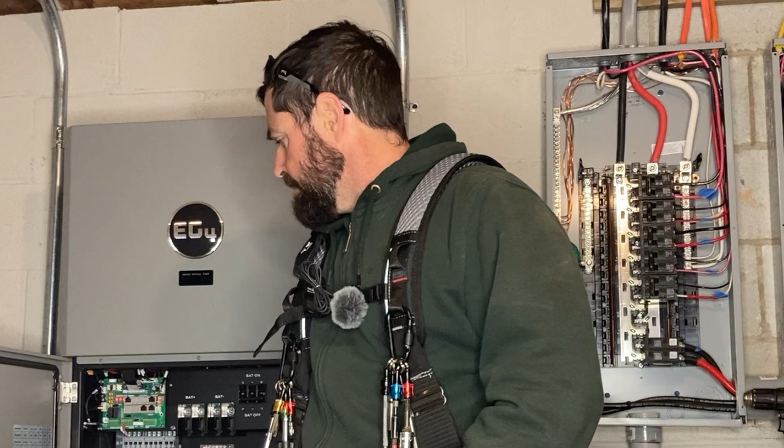We're going to be down here pulling some wire for the DC. We're going to be mounting some bus bars that are going to connect our EG4 inverter in the future. We should have a really great series for you to watch today. Let's get into it. All right, so I've got my layout started here.

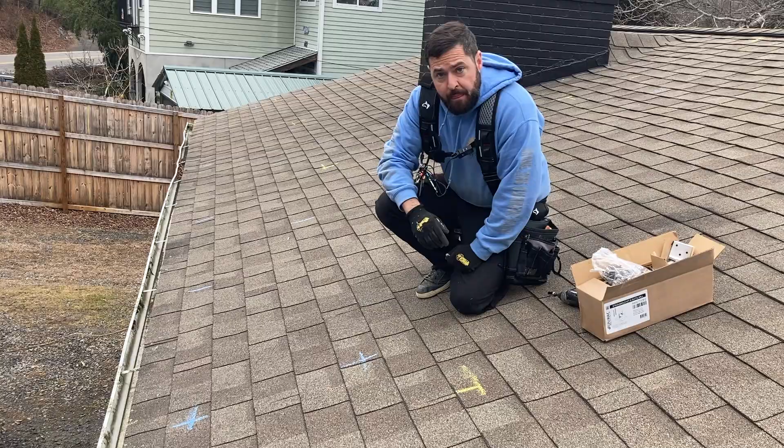A few things to note. A lot of people use lumber crayons, but those marks will stay on your roof for 5 or 10 years, and if the roof is visible, you'll be looking up at some bright red or yellow crayon marks all over your roof to the end of time. So what I like to do is just use plain old sidewalk chalk, and that way it'll just wash off after a few rains, and it's not going to stay up here forever.

Another thing, I use 2 different colors. I use one for my attachments or rails and another for the corner of my panels. It's really easy to get turned around up on the roof once you do your layout if everything's in the same color, and you end up drilling holes where you shouldn't. So I always like to use 2 different colors. I mark out all the edges of my arrays, the edges of the panels.

That way they'll be staggered, hitting different rafters all the way down, and it's going to evenly distribute the weight of the racking system and solar panels on your roof. Instead of having all the attachments on one single rafter all the way down your roof, it's distributed amongst different rafters. So today I'm going to be using the Unirac NXT system on my roof. It's just a brand that I trust and I've worked with for years.

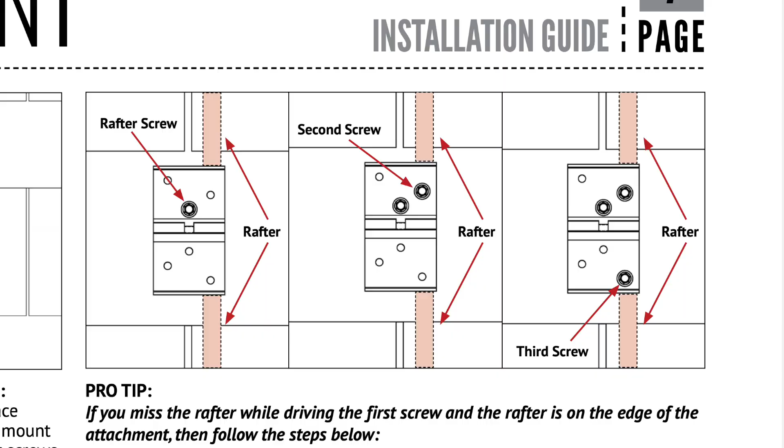If you miss on the next 2, well, you just sink all 6 screws into the attachment and you leave it deck mounted. And that way, hey, you never have any missed holes to seal up.

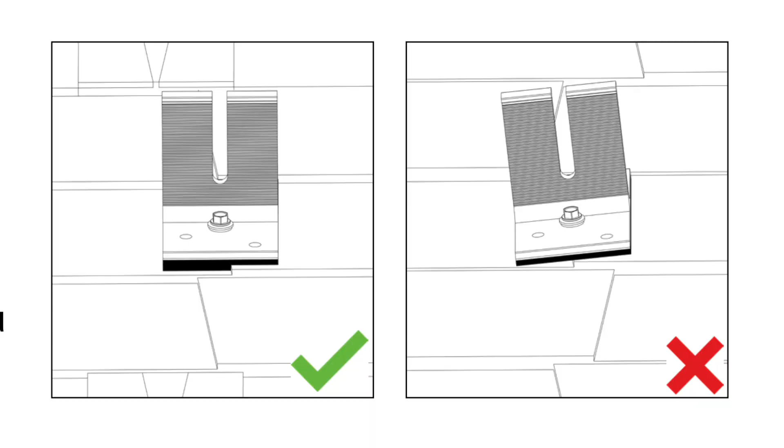And you know, it just preserves the integrity of your roof much better than, in my opinion, a flashed foot will. Now, a couple things you may want to note. Technically, you're not supposed to straddle the edge of a shingle. So in some cases, they do sell little extra butyl pads where you can put additional butyl below.

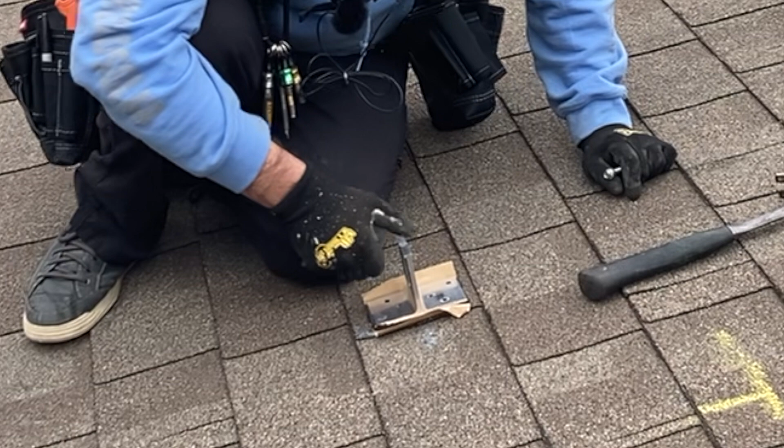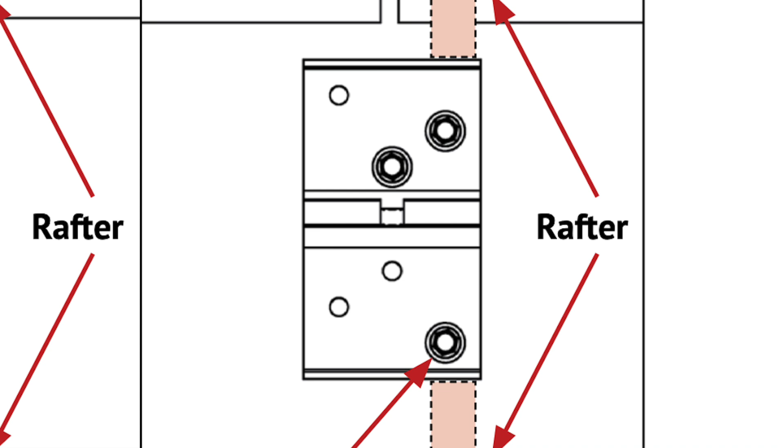Another thing is you can move it. So you can use any 2 holes on here again. So in this case where I've got this shingle edge, I can line it up right with the edge there and try to hit that. And then again, if I happen to miss and it's not this way, I can just sink all 6 and call it a deck mount.

All right, and that was solid as a rock. You could just tell when you're in a rafter, it really locks in. When you miss, it's gonna go in real easy and it might spin. So in this case, I've nailed the rafter dead center.

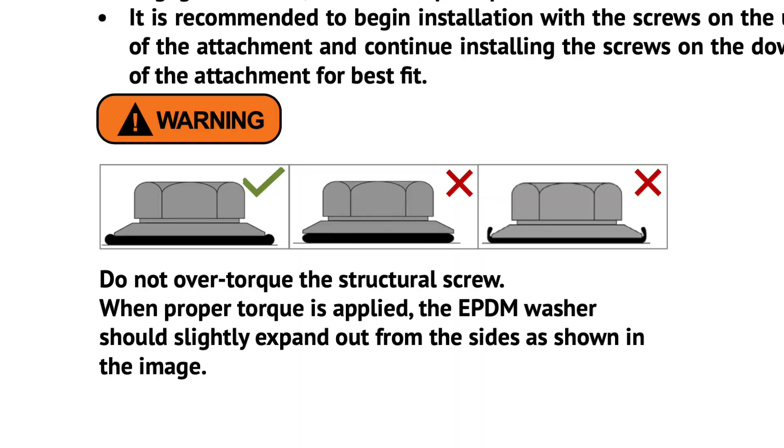And you really just wanna screw these in till they seat. You want them tight and you want that washer seated against the attachment, but you don't want to lock it down so tight that that neoprene washer blows out and kind of sticks out of the side. That'll cause premature failure of the neoprene washer.

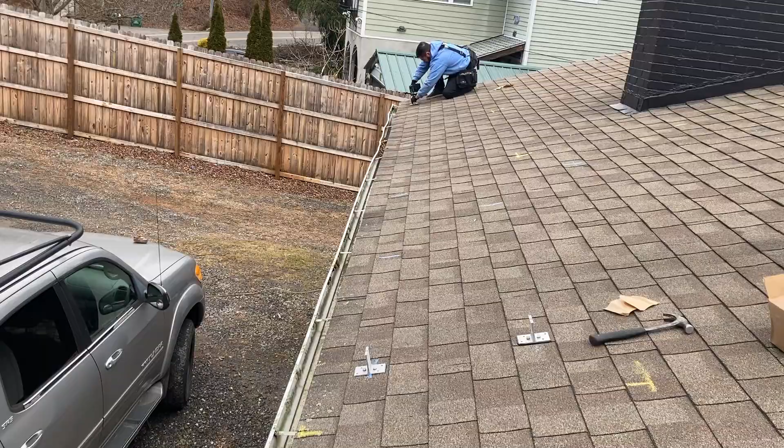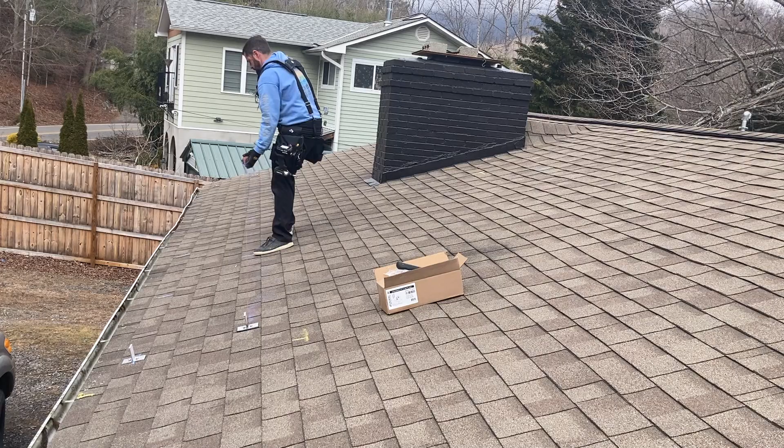So now I've got my first and last feet mounted. I'm gonna go ahead and snap some string lines to make sure they're all lined up nice and even, so that our rails are nice and straight. All right, and I can feel that one sort of curve off the edge of the rafter. So again, I know it's to the right here.

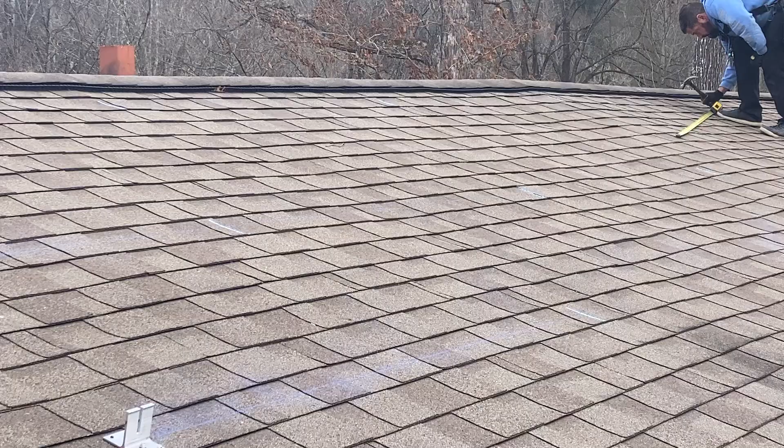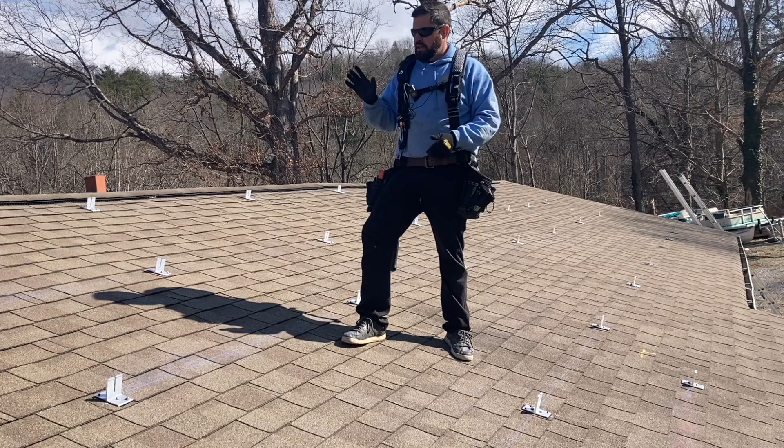All right, so I've got pretty much all the feet down. One thing to mention is I ran out of screws. So Unirac sends 2 screws per foot. I guess they're assuming you're a perfect person, but we all know that doesn't exist out there. So no matter how good you are at finding rafters, at some point you're gonna miss a rafter. I'd say probably about 10 to 15% of these feet, I didn't lock that rafter in with the first 2 screws, and I had to add more screws in order to make sure I hit the rafter and it was nice and secure. I think there was only one attachment where I had to use all 6 screws because I missed the rafter altogether.

Now, if you're in an area where you've got thick plank decking for your roof sheathing... I've got plywood. That makes it really easy to find rafters. You can hear that hollowness of the roof when you're beating on it with a hammer. But if you're in an area where you've got that thick 1-inch decking, old plank decking, or maybe skip sheathing or something like that, it's gonna make it a lot more difficult or almost impossible to find the rafters on those projects. So in that case, you may even want to order up to 6 screws per foot.

Now, I do believe I ordered a couple extra bags of screws because I knew this was gonna be an issue, but it doesn't look like they came with the order. May have been my fault, I'm not really sure. But basically I ran short there towards the end. So that's gonna slow us down for today. I'm gonna go ahead and get the rails mounted on the attachments that do have all screws secured. And I'm gonna have to order some extra screws for the ones on the ends and continue this next weekend.

So next we set this into the rail. This is what's going to hold the rail itself. I'm just going to kind of leave these lying loose because I'm going to get them all in there, get the rails in, and then we're going to level the rails. So I'm just going to go around now, get all these in there, and then start laying rails.

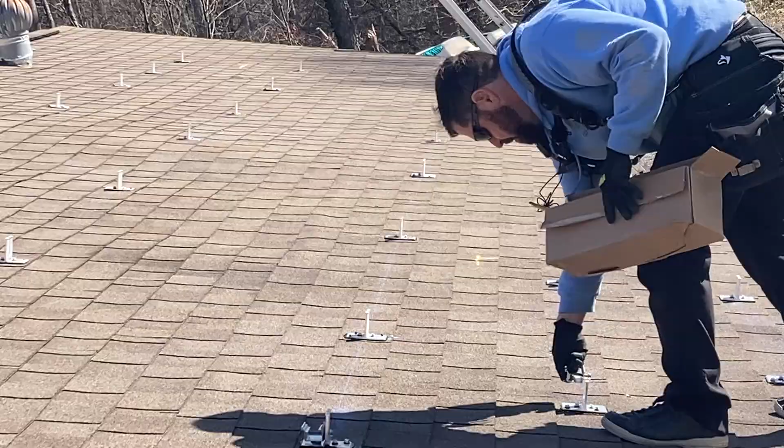All right, so you just kind of snap them in place. You can feel them kind of click. And then I'm just going to snug it down. These are likely going to get moved.

Okay, so I usually like to leave my rails in full length and lay the panels and mark the rail when I'm done with the last panel, marking it exactly where I need to cut it and cut it in. Because when you cut them to length ahead of time and things aren't perfectly square, they don't always line up the way you would like.

In this case though, I've just got basically a stack of 2 panels each, and this chimney is kind of in my way over here from leaving these fully extended. So I'm gonna go ahead and go against my own advice here and pre-cut them, and I'm just gonna be very careful to square all these out really well so that when we go to lay panels, everything lines up perfectly. So I am leaving about an extra 3/8 of an inch just to leave myself a little bit of wiggle room.

And remember, when you're pulling these measurements, you got to include not only the width of your panels, but also the end clamps and mid clamps. Since I'm using Unirac NXT racking, each clamp, whether it be a mid clamp or an end clamp, is about a 1/2 inch wide. So you're gonna add a 1/2 inch for each end and mid.

Next, we want to make sure we're not going to hit a rafter. In this case, I know my rafter's right here. We got hollow roof, so I'm going to kind of pick my location here. I'm going to use the lid as a template. And I'm going to make sure that it is between 0 and 2 inches down from the next course of shingles. So in this case, let's just go with 1 inch. All right, so that's the outline of the box.

In this case, we're going to be flashing the box up under this layer of shingles, and then we need to make sure that no nails are going to prevent it from coming up under the next course. So when you do this, you want to take it nice and easy. Make sure you don't rip any shingles.

All right, I think I'm going to be clear of nails, but we'll find out when we go to flash it up under there. So next I'm going to cut my shingles. I use a pair of old tin snips. I know it's probably not great for the blade, but they do make a great shingle cutter.

Now we're just going to test flash it. Oh, it fits like a glove. We didn't hit any nails, which is great. That means we don't have to pull any nails out.

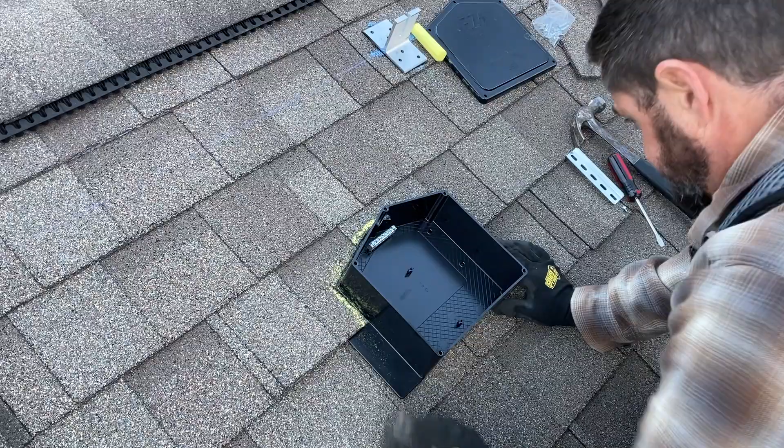All right, so next is the drill zone. I'm going to be bringing 1-inch conduit into this to bring my PV strings and my communications cable for the Tigos. And we kind of want that in this area, you know, above the layer of shingles. The box will come with some instructions on the drill zone. In my case, I'm just going to put it right up here near the top. So I'm going to use a hole saw, and I'm sizing this hole to be the diameter of my conduit fitting.

So now I've got my hole drilled for my conduit fitting. Now something a lot of people are going to kind of screw up here is that we want a larger hole for the hole that's going through our roof deck. The reason being is this conduit fitting is going to be sticking down through the deck, and it's wider. So if you only drill the hole this size, you're not going to be able to get your conduit fitting up into the back of the SolaDeck. Or in this case, the EZ Solar Junction Box XL.

So we'll test fit that. We're going to get that fitting in place. If you're working with multiple people, you might have someone in the attic stubbing the conduit up while you put on the lock ring, but I'm working solo here, so I'm going to try to do that ahead of time, so it makes it easier to install the conduit in the attic by myself. All right, so now we're going to do the larger hole.

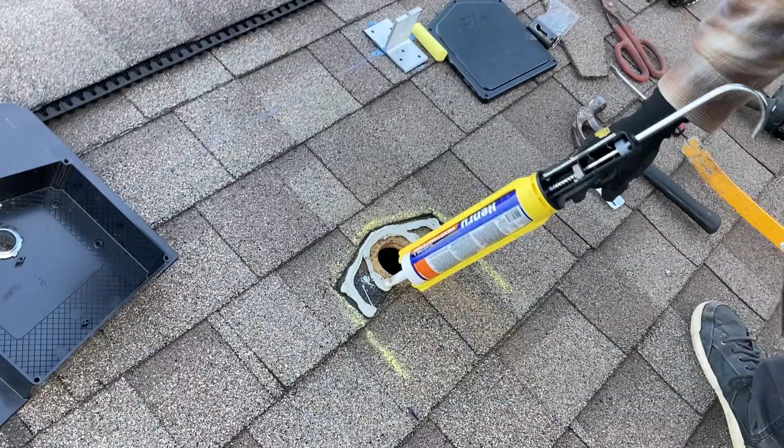Real generous with the sealant right here by the penetration, but I'm going to leave the bottom open so that if for any reason water ever does get under there, it's going to be able to easily drain. Now we're just going to drive our screws through. And we're just going to put another layer of sealant across the upper edge. It's really not necessary, but belt and suspenders, as one of my great mentors used to say.

All right, so this thing is installed and ready to rock. We're gonna save wiring it up for another day. So I'm just gonna go ahead and put the cover on. You'll notice these stainless steel screws are the ones for securing the box. Here I'm just making sure that any of those nails I had to pull out are going to be nice and sealed up, so that we don't have any water ever making its way back down in here.

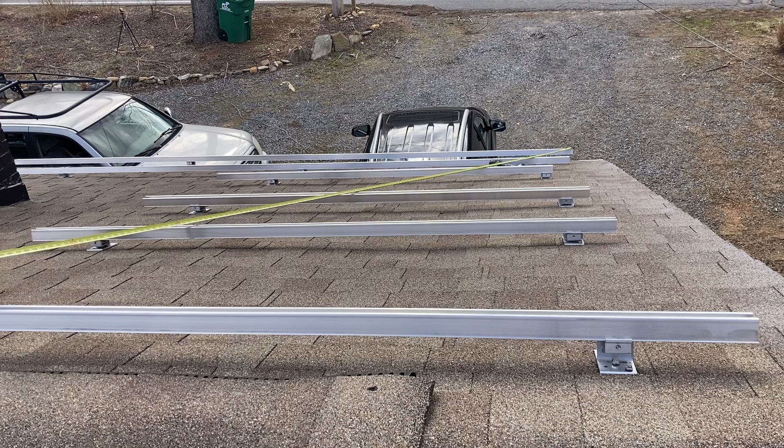All right, so now most people might have a second person. This is what is ideal in this scenario, and you'll pick one corner of the tape measure to put to that corner of the rail. I'm just going to have to try to center it because obviously I can't really play a balancing act with the tape measure here. So I'm just going to try my best to center that corner on the center of that tape measure. I'm going to pull it up to the edge of this rail and get my measurement. So to the top of the tape measure, I have 193 and 5/8.

So next I'm going to do the same thing with this one. I'm going to try to center that tape measure as best as I can. We're going to pull it to our mark, to the top of our tape measure. We got 194 and 3/4. So we're off by like 1 1/8 inches. This way it's longer, so we want to make it shorter.

The way we're going to do that, we're going to keep this bottom rail as our point of reference. We're going to move the top rail over to the right. Roughly, we'll just give it 3/4 inch and see what happens. So I can just mark my rail at the foot here.

194 and 5/16. All right, 194 and 5/16.

All right, so now that we got our top and bottom rail locked in, we're going to pull a string line from the top to the bottom, and we're going to line all of our other rails up in between. So we'll tie a little knot. We'll just hang it on the bolt down here. Now we're gonna pull our rails to the edge.

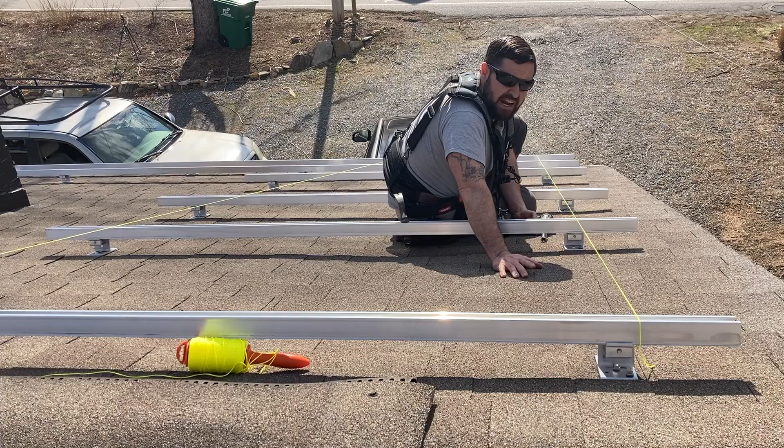All right, so I'm sure you got the point by now. We're gonna go ahead and do this across the entire array and continue on. All right, so now we've got our Unirac splice kits, rail splices. They're pretty simple. You just slide them into the rail. There's a little line right here that you want to line up with the seam.

Me personally, I like to leave a tiny little gap, and that way it just provides a little bit of room for thermal expansion and contraction. I'm just going to use maybe 1/16 to an 1/8 inch of a gap there, and we're going to lock these into place. All right, and so that bonds the rail together electrically, as well as connecting it together securely physically.

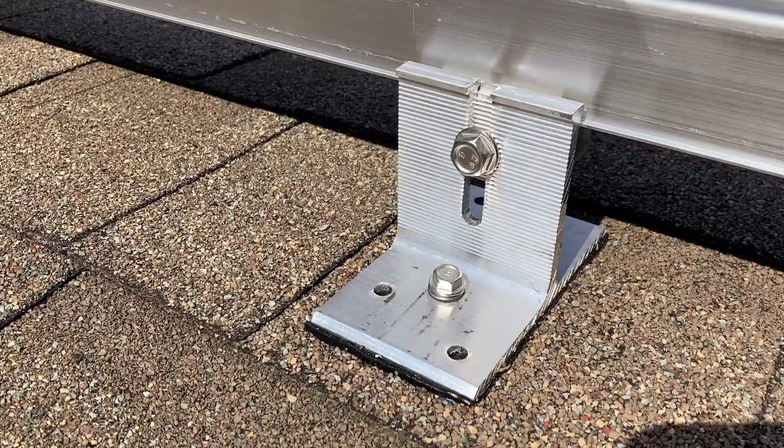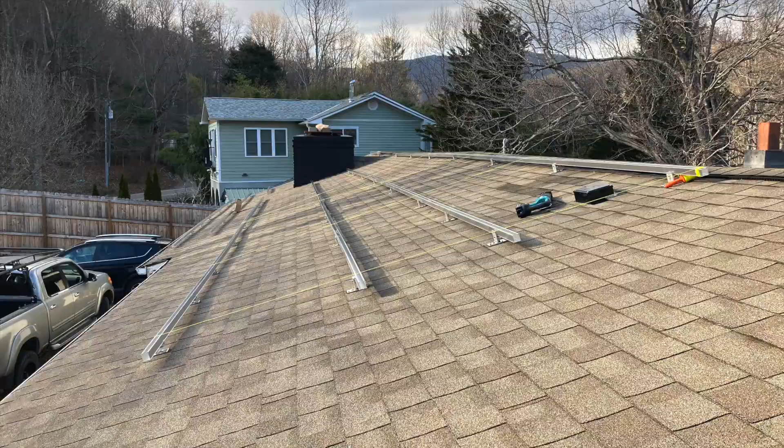So I can't stress enough how important grounding and bonding all of your racking and all of your components on the roof is. For those of you out there that might be DIYers and think it's a step that can be sort of overlooked or ignored, it can't. It's very important. It's due to safety. If at any point you pinch a wire on the roof or anything metal on the roof gets electrically energized, which is extremely common in solar.

Somebody pinches a wire under a module, squirrels come up here and chew the wires, something like that, and a hot wire touches metal, it needs a way to clear that ground fault, to follow that ground wire back to the source and trip a breaker or an overcurrent protection device so that it de-energizes the system until you can hunt down that ground fault and fix it.

If you don't, what happens is you've just got a solar panel or the racking up here energized with high voltage DC current, just sitting here energized, and it doesn't clear a fault. The system just keeps running. Everything seems like it's fine until someone comes up on the roof and touches something the wrong way. They become that path to ground and get electrocuted, fall off the roof.

You know, I just can't stress enough. High voltage direct current is nothing to play around with. You have to ground and bond everything electrically. It's critical for the safety of your system.

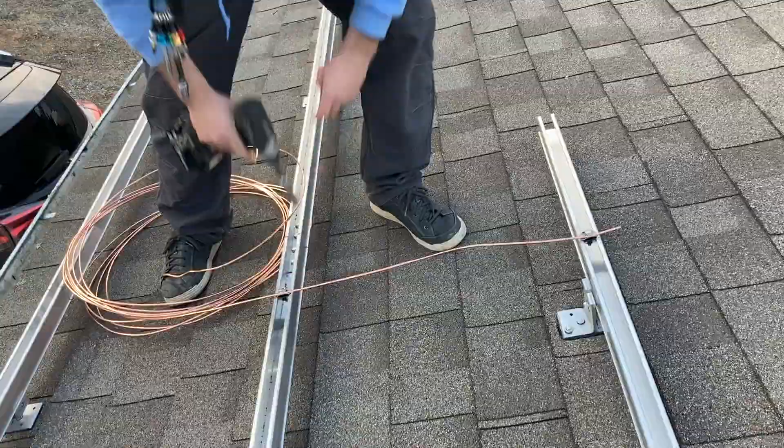All right, and so technically you don't need to use one bonding lug per rail. You really only need one bonding lug for every other rail or every row of solar panels. So for every continuous row of solar panels, you need one bonding lug for that row. And that's because the mid and end clamps also bond the solar panel frames to all the racking, and so everything's kind of bonded together.

Me, I just like to hit every rail regardless, just again to make sure no matter what, I've got a nice clean path to ground no matter what happens. Again, as a great mentor of mine once said, belt and suspenders.

Okay, so now we're going to run our PV wire. This is number 10 PV wire. It's rated to be in the sunlight, 90 degrees C. This stuff here is up to 1,000 volts. By code, I think you only are going to need up to 600 volts, but I went with the 1,000.

Most of the time I like to use red PV wire for my positives and black for my negatives. By code, you don't have to. PV wire is one of the wires that has that exception that allows you to use marking tape, even though it is smaller than 6 gauge. In this case, I just bought one big roll of black, just because you save money when you just buy one large roll.

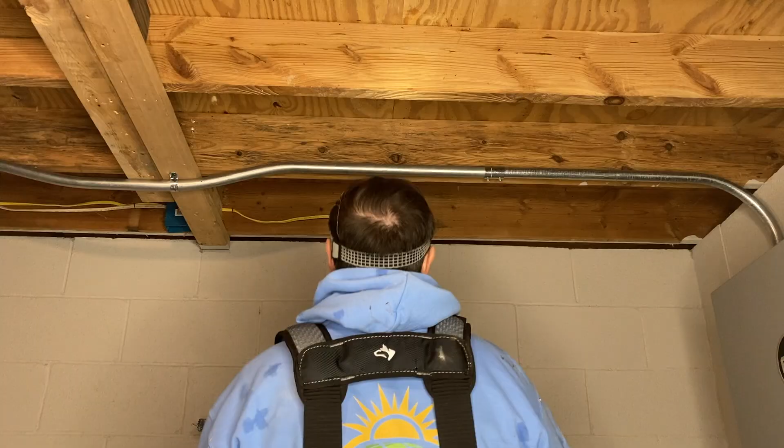All right, so a few things you should know about the PV power source circuit. So the PV power source circuit is the DC circuit between the solar panels and the inverter. So for microinverters or things like that, you don't have to worry about it. That's just a little jumper on the roof. But for DC connected solar panels that are running through your home, you've got your photovoltaic power source circuit. Few things to know about that.

It's got to be enclosed in metal conduit. So that can be EMT like this. That can be flexible metal conduit. It can be metal lined liquid tight conduit. It can even be like armored cable or MC cable. There's many options you can choose, but it has to be in metal conduit. In my case, I used EMT because I had a little bit left and I just figured I'd finish the last little run with EMT while I was at it.

But honestly, that's kind of nonsense. Nobody that's on the clock would do that, because trying to climb up and back and forth out of an attic, bending conduit, is just not really feasible. So most people would use flexible metal conduit in the attic space because you can just terminate it, run it through the attic, strap it.

You do have to strap it much more often. Flexible conduit and MC cable, things like that, usually have to be strapped every 3 feet. EMT only has to be strapped every 10 feet or 3 feet from a termination. But in this case, I just hard piped it with some EMT. Regardless, I've got it strapped here.

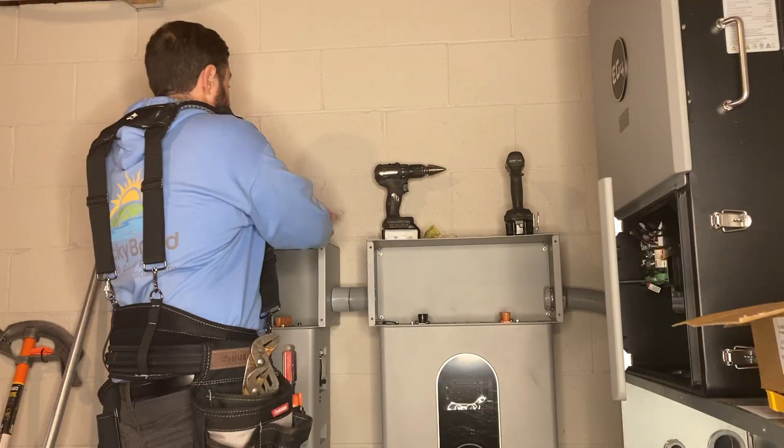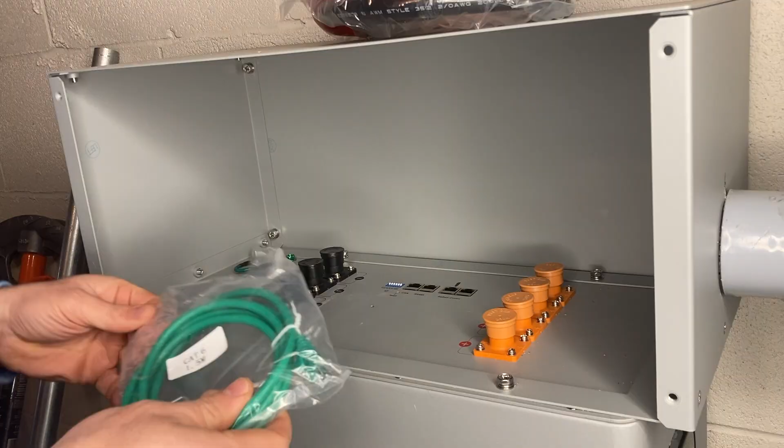So now we're going to install our paralleling cables. It's essentially just a positive and a negative with the 2 Deutsch connectors on the end and a little Ethernet cable or RJ45 cable. Alright, so I've pre-marked my comms terminal there with a Sharpie just so I didn't get confused. But essentially, this is going to be the last battery of the 2. So it's basically just going to connect to the other battery, which is then going to connect to the inverter.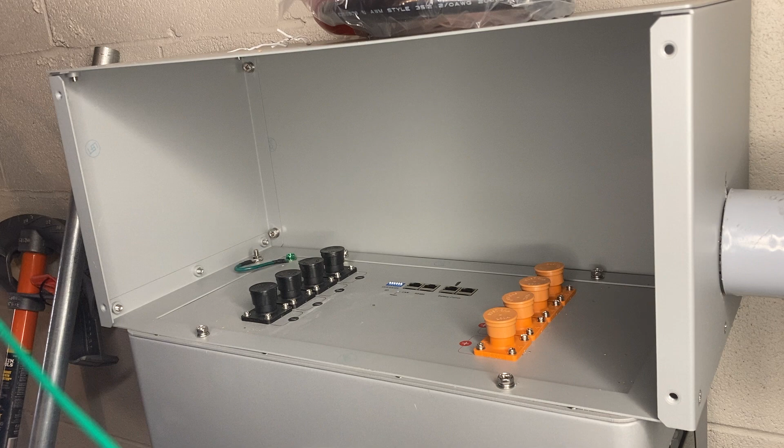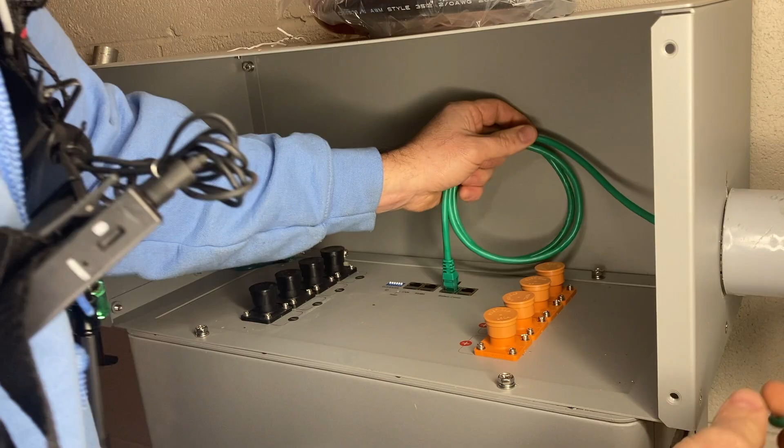Alright, so at this end, we're going to plug it into the battery terminal. So I'm going to go ahead and pull the wire through first. I'm going to go ahead and plug this into the battery terminal. There we go. Now over in the other battery, which is going to head to the inverter, I'm going to plug it into the COM terminal.

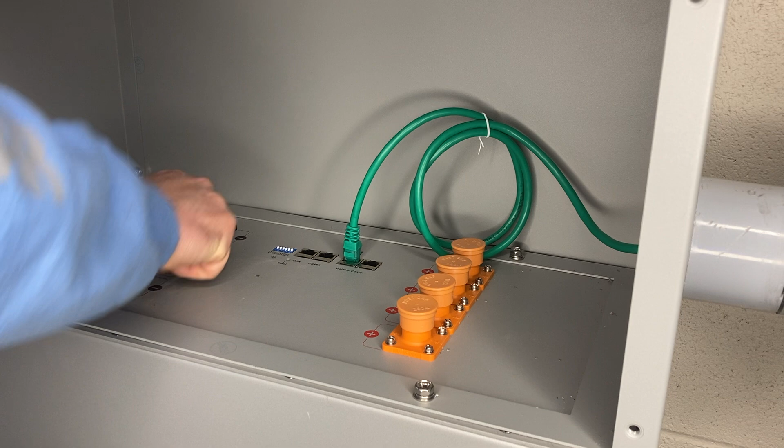Alright, and we really just need one negative and one positive to run from this battery to the other. I'll go ahead and pick these 2. So this is my positive cable. I'm gonna go ahead and connect it right here. Alright, I heard that nice audible click. Do the same over here. There we go. Nice audible click. Same thing on this side. Alright, well that was easy.

So for now, I'm just snugging these wires down real good, but I'm gonna come back later with the torque wrench and torque them to spec.

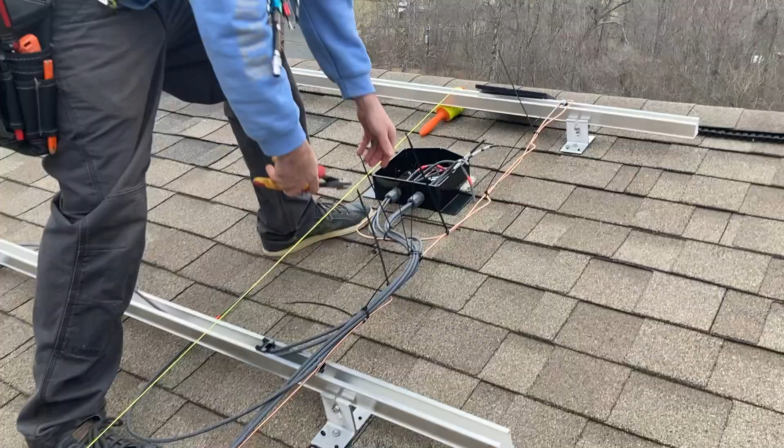Alright, so what I'm doing here now is I pre-ran my fish tape through my conduit to get a length of my wire. Now if you're an electrician, obviously you've got tons of wire spools in your van. Well, it's pretty easy. You don't need to pre-measure your wire. You just run your fish tape up through there. In this case, I've got 3 strings plus a communication wire for my Tigos. So what I would do is I would run 3 rolls of number 10 red THHN, 3 rolls of number 10 black THHN, and a roll of the 18 gauge twisted shielded. And just pull them, terminate them, go cut them to length at the other end, be done with it.

But in this case, and in most cases, if you're someone at home, DIYer, you're not going to have a bunch of different spare rolls of wire. You're probably just going to buy one big roll of wire for your project. So what that means is I'm going to have to pre-measure first by running my fish tape through the conduit, marking it to length. I'm going to pull my fish tape back out of the conduit. I'm going to lay it out in the driveway, and I'm going to run 3 rows of red, cut them to length, 3 rows of black, cut them to length.

It is going to be difficult not having them get all tangled up in a big rat's nest, which is another reason why it's great to just unspool them right off the wire roll and cut them to length. But in this case, I just can't do that. So we've got it pulled, we've got it marked. I'm going to go ahead and pull my fish tape back out, get out there and start cutting some wire.

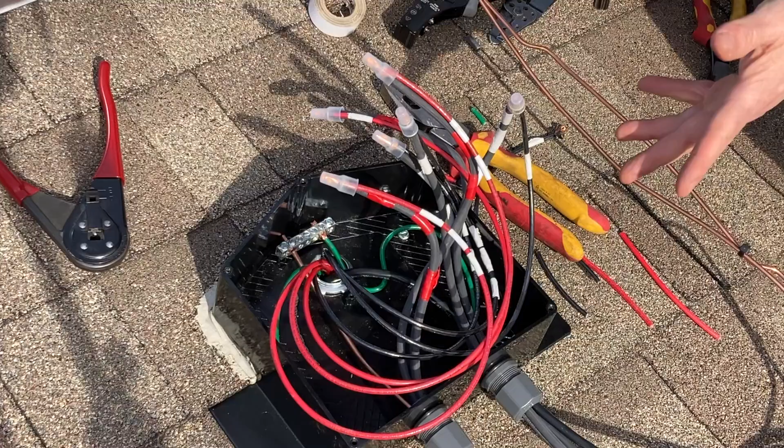All right, so our rooftop combiner is all wired up. We've got our equipment ground on the rack connecting to our equipment ground going down to the inverter. We don't need a vinyl bushing here because these wires are smaller than 4 gauge. We also do not need to worry about having a grounding bushing up here because that conduit is grounded down at the inverter.

All right, so now we've got our connections to the solar panels. These are going to be using Staubli MC4 connections. So depending on the brand of your solar panels, they may use the Staubli MC4s or they may use the Amphenol H4s. Now I've used those mated together for 10 years in the solar industry. I never had any issues, but technically I don't think they're a UL listed connection. So in this case, my solar panels are utilizing MC4 connectors, so I'm going to go ahead and utilize Staubli MC4 connectors.

Now, Staubli is the original manufacturer of the MC4 connector, and you do not want to cheap out and just buy some generic MC4s off of Amazon. There's no testing, there's no tolerance with those, and you can end up with a bad connection and arcing and failure of the connections. Again, connections are the #1 source of issues in the solar industry. You want a nice solid connection. Go ahead and spend a little bit of extra money. Get the ones made by Staubli, and you know that you're going to have a nice UL listed connection that has been tested and is tried and true.

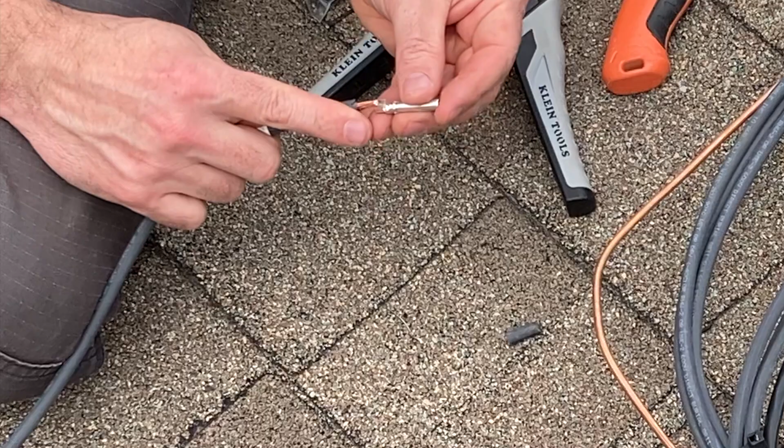So in this case, I'm going to take my Klein solar wire strippers. I'm going to use the 10 stranded setting. I'm going to go ahead and knock a piece off there. I do just enough wire for it to kind of go up into that metal connector, just the hair.

Next, I've got my Klein MC4 crimping tool. I'm going to go ahead and drop it in the number 10 die. What I'm going to do is I'm going to sort of pinch these together a little bit first so that they fit in the die. I'm going to drop it in my number 10 die. All right, you see that? We're in the die.

I'm going to put my wire in, and I'm going to crimp it down. And I'm going to crimp till this thing is all the way shut. And you'll see that is a nice solid connection, nice UL listed connection. It is not coming loose. That is tried and true. Again, this is a female connector, even though it looks like a male connector.

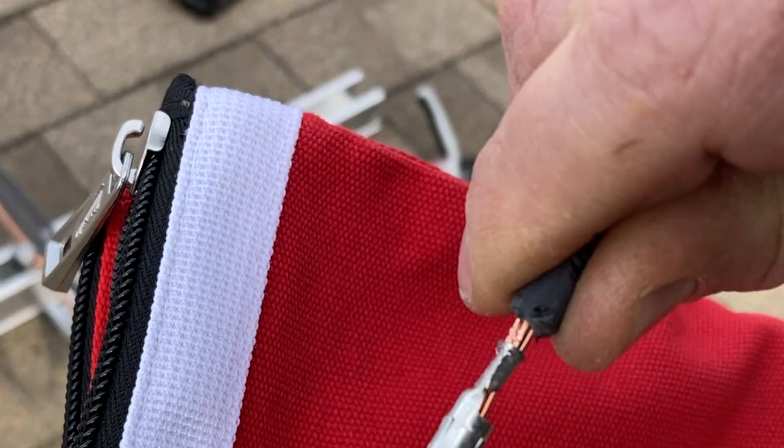In this case, I don't have my little plastic tool up here at the moment, so I just use the old tried and true method of using my teeth. I do that, I tighten as much as I can by hand, and I call it a day. It's what the crimp is supposed to look like. That sucker's not going anywhere.

Alright, so I think that's going to conclude the weekend for me. That's about as much as I'm going to get for part 3 of the install series. I'll go ahead and try to get this edited and posted as quickly as possible. And then again, I'm trying to make as much progress as possible with the time that I've got. Really appreciate each and every one of you.